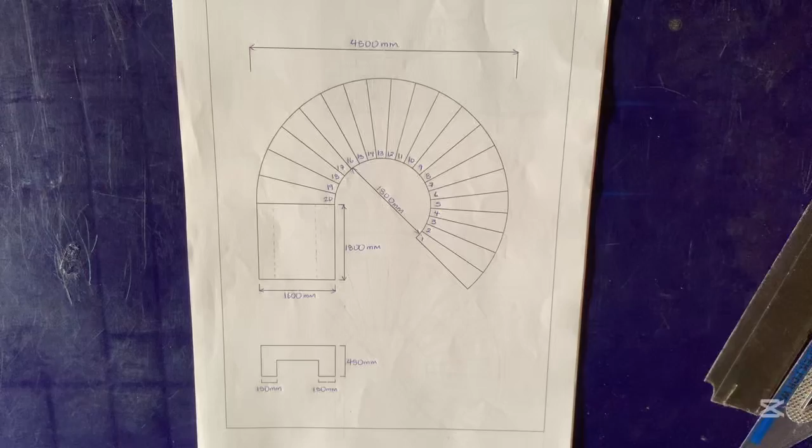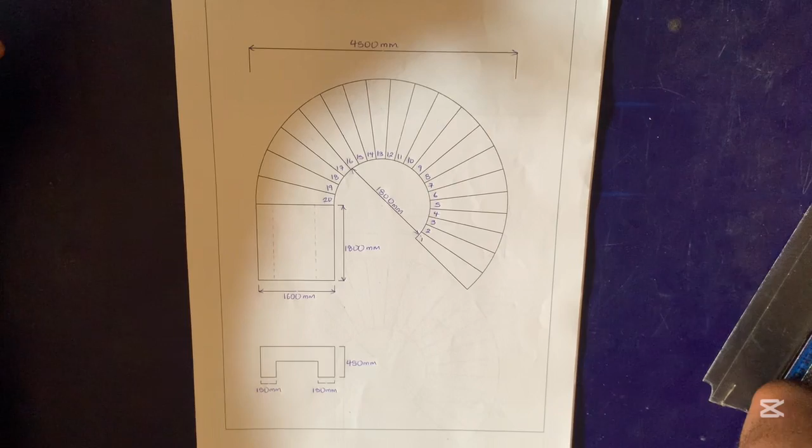In today's video we're going to be treating how to measure the quantities for a spiral staircase. So if you're conversant with measuring the quantities for a conventional or traditional staircase, maybe a dog leg staircase, this is not any different. The only unique thing about this spiral staircase is that it is spiral. However, the quantity that you are going to be measuring for it is the same.

You'll be measuring for the concrete work in the same manner that you measure the concrete work for a normal staircase. You'll be measuring the formwork, the reinforcements, and the balustrades that come with the staircase. So like you all know, the parts of a staircase remain the same. We have the step, the risers and the treads, the waist, the string, the landing, and so on and so forth.

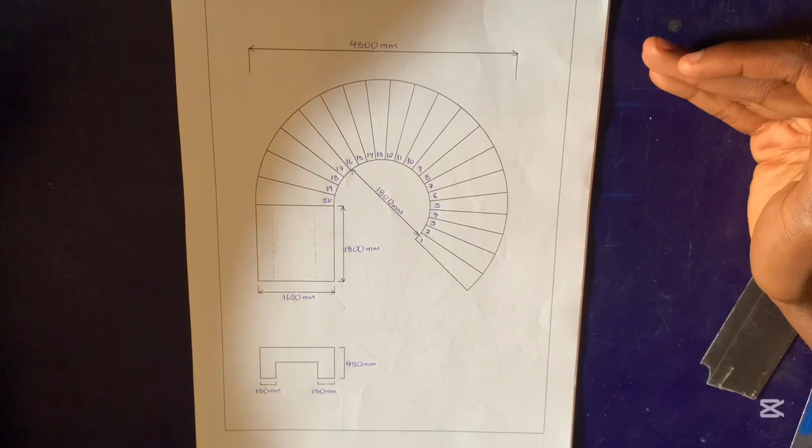Okay, first things first, let us try to understand what the drawing is talking about. So as we all know, this is our landing. You can see that there are hidden details under, meaning that there is a beam under supporting the landing, as you can see in this section here. There are two beams supporting the landing at the sides. The beam ends just on the landing.

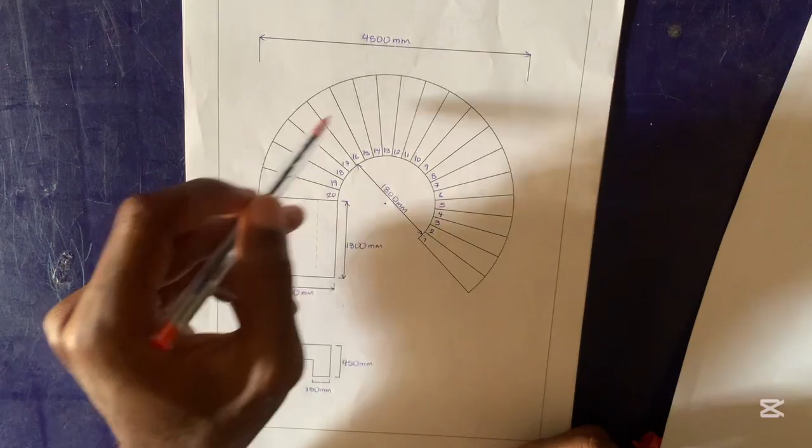There are some cases where the beam goes round the staircase also, just to support the waist. But as you can see in the drawing, there was no dotted line within the waist. The dotted line was only at the landing, meaning that it is only at the landing that we have this beam support. Now the next thing we're going to be looking at is the step.

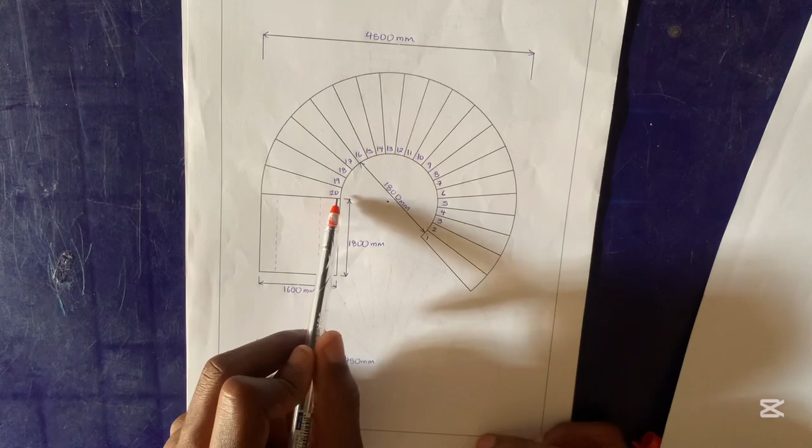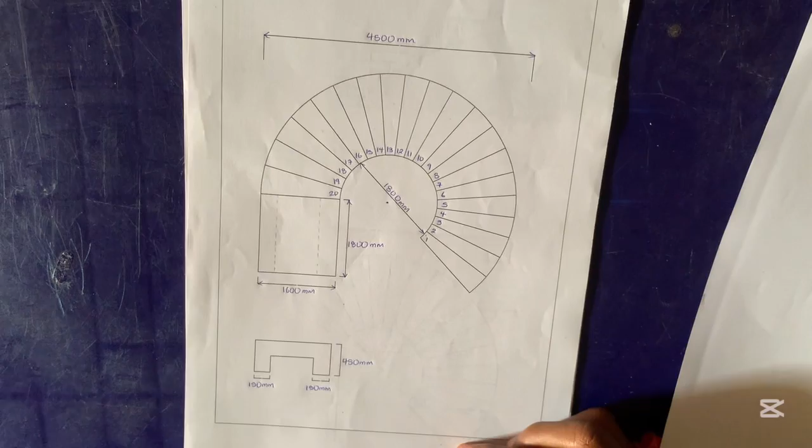Normally if this was a dogleg staircase, the step would be rectangular, but you can see because it is spiral, it is curving. One side is bigger than the other side. So even though we know that this place is going to be slightly curved, you can assume that this is a trapezium shape. So how many steps do we have? We have 1, 2, 3, 4, 20 steps.

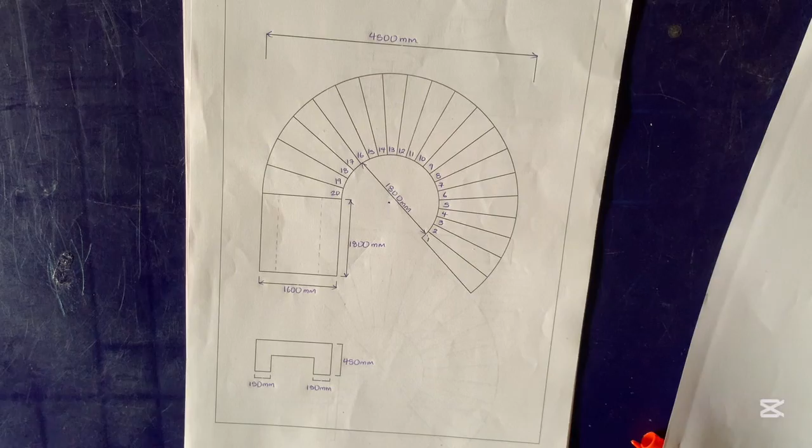20 steps. And they told us the internal diameter of this staircase, because we know that a spiral is kind of like a 3D line, a line curving and moving at an altitude. However, if you look at the spiral from above, from the plan, you are going to be seeing a circle. That is why we have something like this.

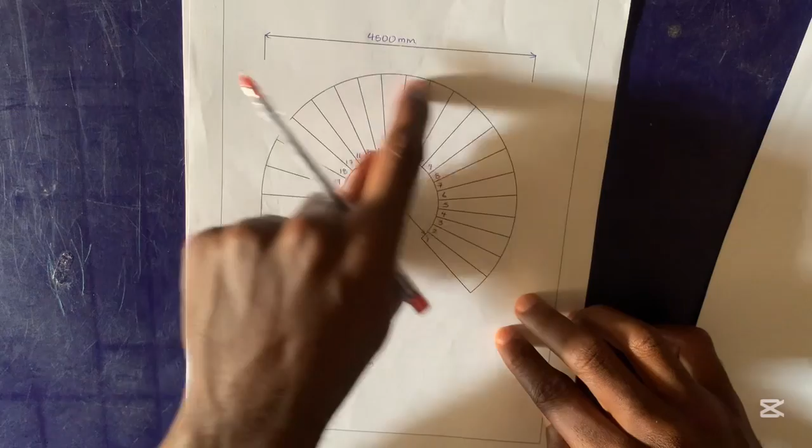Although this staircase does not give us a complete circle. It does not go round multiple times before we get a landing. The staircase just ended here before we have the landing. That is why we have something like a semicircle here. You are seeing a circle here because you are seeing it from the plan. If you are looking at it from an elevation, this is what you are going to be seeing.

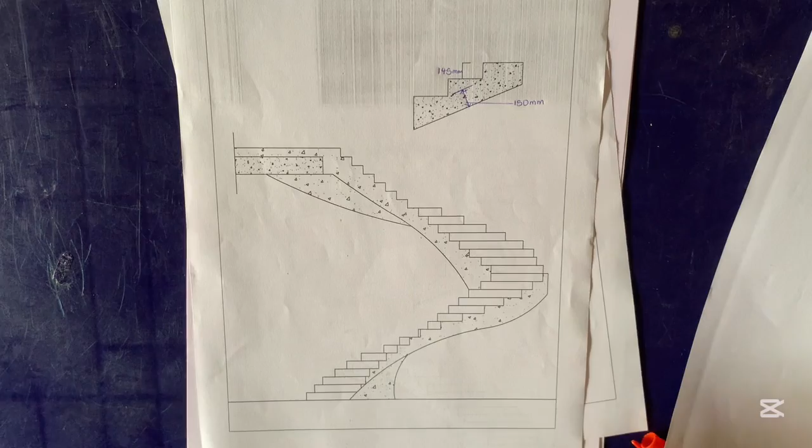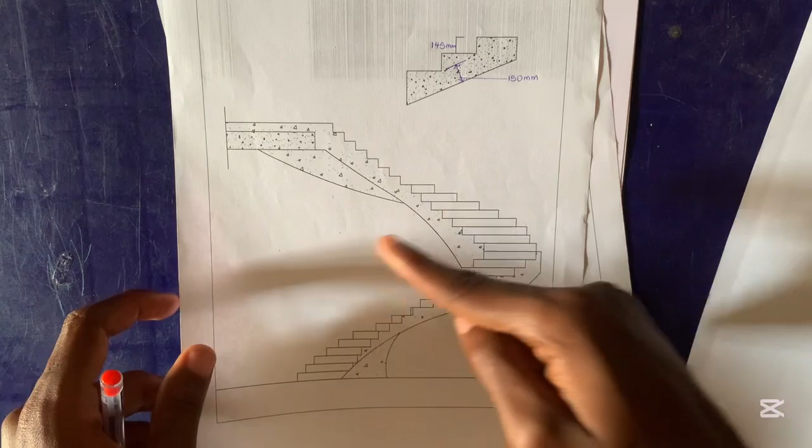I hope you can see this clearly. This is what you are going to be seeing. So you can see that we have a curve, meaning that the landing ended just close to where the beginning of the curve started from. This is just a caricature drawing, but it serves the purpose. So you can see that it is elevating. But if you are looking at it from on top, this is what you are going to be seeing. So we've done our landing, we've done our steps.

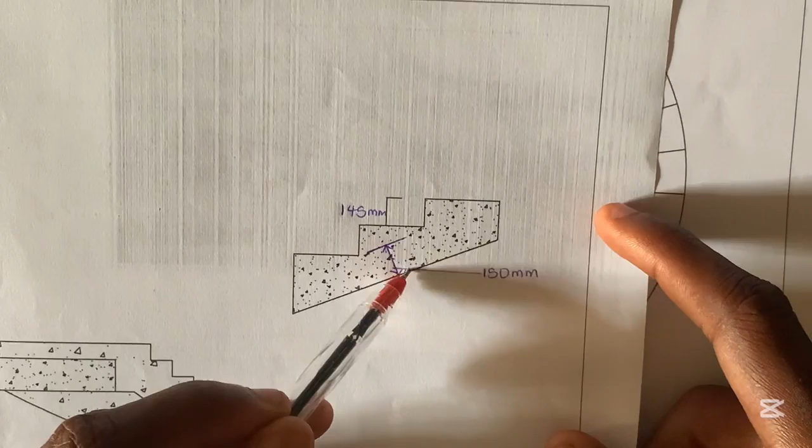Now the next one is the waist. Let me zoom in. The waist is this part here. That is our waist. Normally in the conventional staircase, the waist is going to be kind of a rectangular surface that has a thickness, because we know that our steps are rectangular and the waist is what gives the steps support. The steps are on top of the waist.

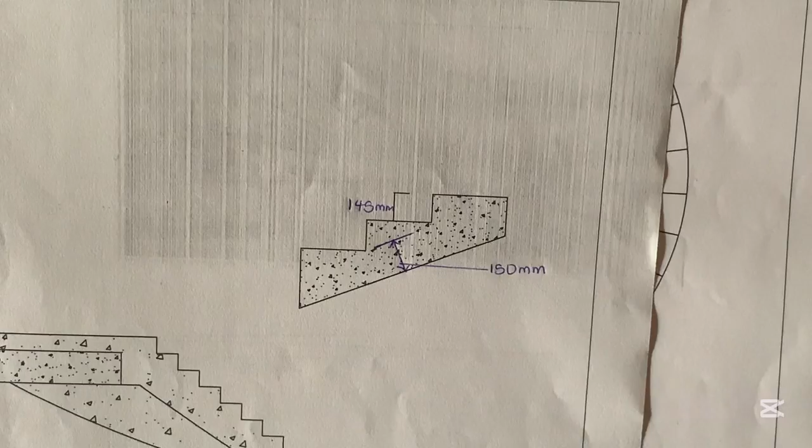However, this staircase is curving. So it means that the waist now is going to follow the curve. So the process we're going to be using to measure the volume for the waist is what's different from the conventional staircase. So these are the intricacies between the conventional staircase and the spiral staircase. Now the next thing we're going to be looking at is how to go about this measurement.

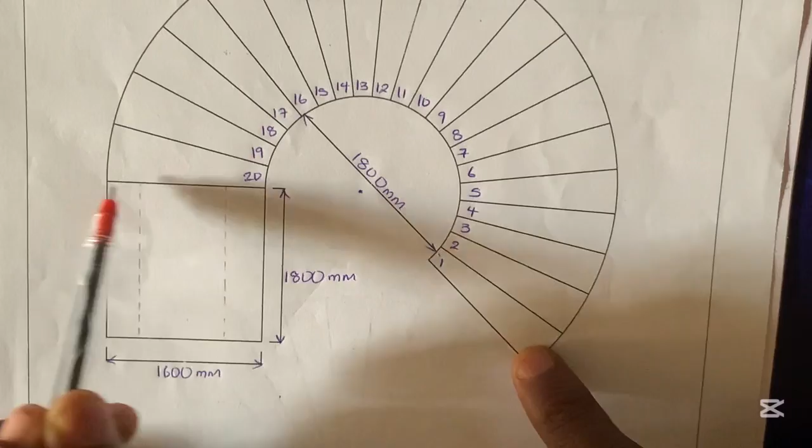So first things first, we're going to be starting with what? The step. I'm starting with the step because we know that the landing is a regular shape, the same way as our landing is in the conventional staircase. So that one is straightforward. However, it is the step and the waist that is different, because you can see that this is not how a conventional staircase is. So now we're going to be putting more attention on the step and the waist.

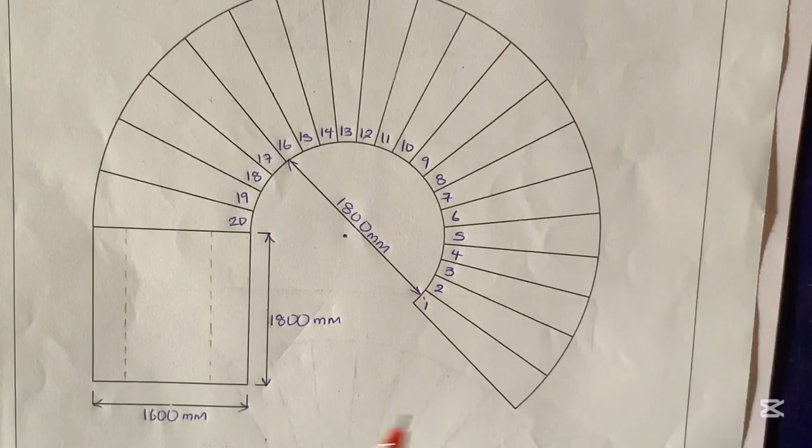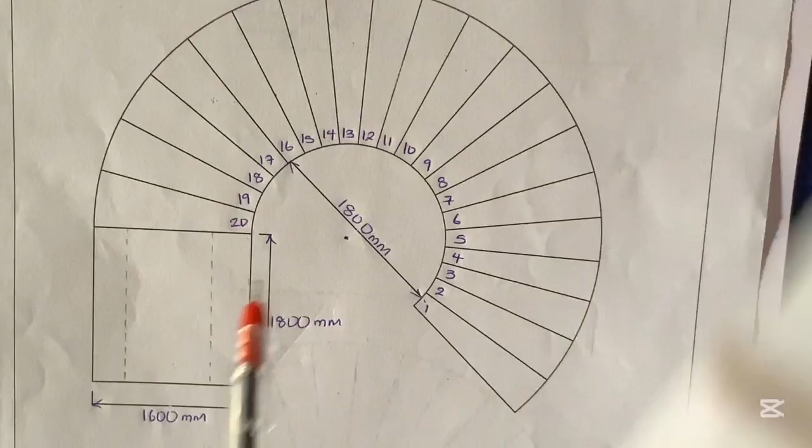So now how do we measure for the what? Step. Now you can see that our step is not a rectangle, right, just as we have in our dog leg staircase. However, this step is formed in such a way that it is going to curve on top of what? The curved waist. Now if you look at this, you can see that this from here to here is our waist, and you can see that it is curving, making it spiral.

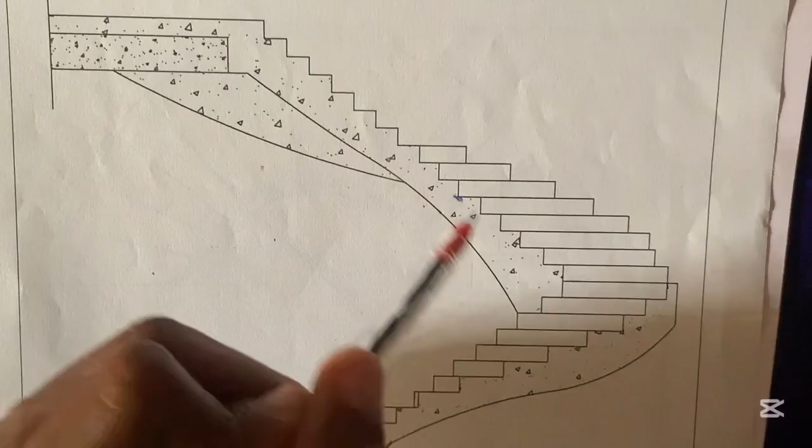So now we need to find an approach that we can use to determine the length of the curve. When we do that, we can also find a way to determine what would be our volume for our steps on top of that curved waist. It is very straight to the point, very easy to understand, so just pay attention. It is not difficult.

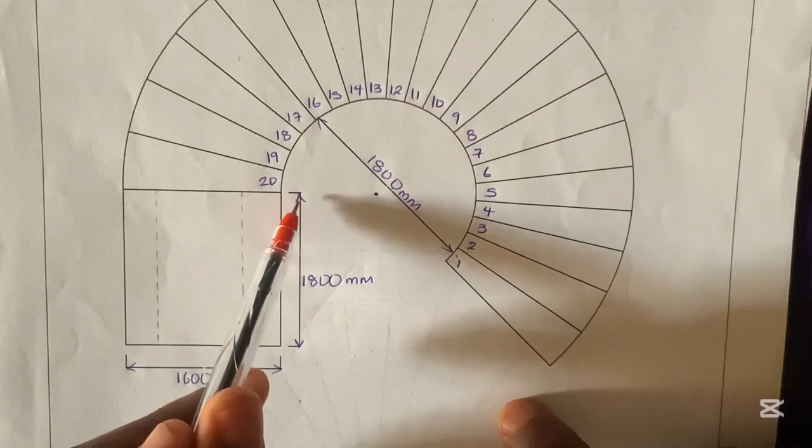Now if we go through the parameters, they said that our landing, the length is 1800 millimeters, and it is as wide as 1600 millimeters. Now they didn't give us the length of this step. So because they didn't give us the length of this step, we have to be smart and find what is the length of the step.

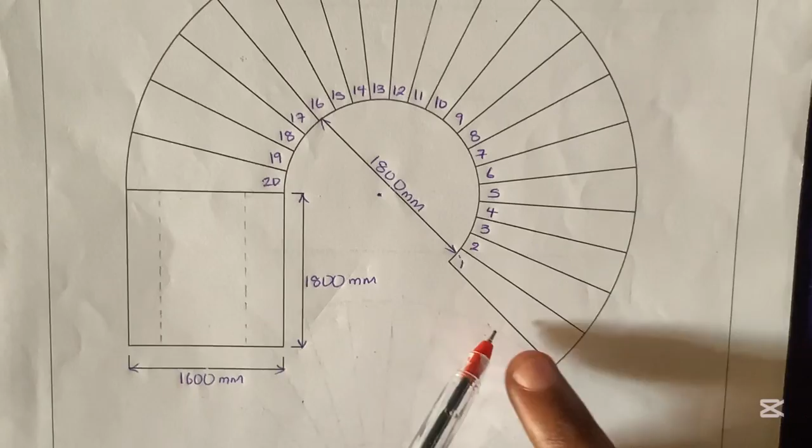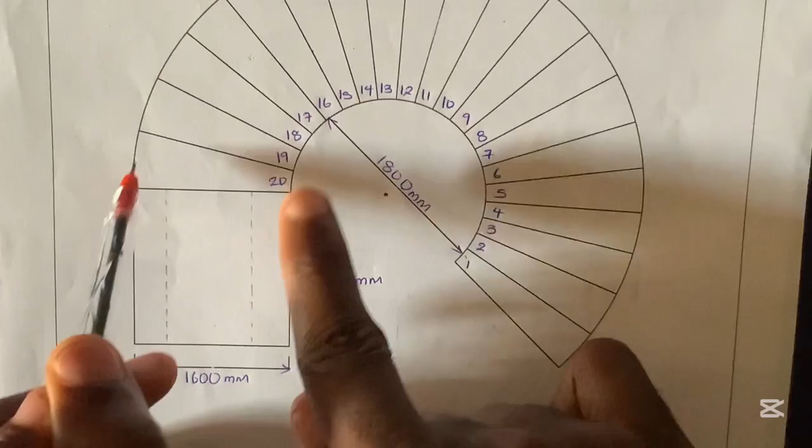So since we know that the length of the step is not given, how do we determine the length of the step? We use our landing, because the step is going to be on the same level as the landing. Now if you look at this, from here to here is 1600. Look at where the step is starting, from here to here, 1600. So it means that the length of each step from here to here will be 1600.

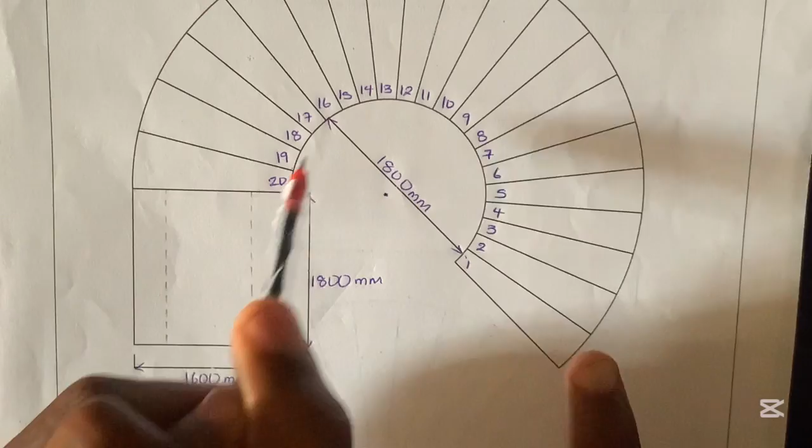The only reason I'm saying it like this is because it is following through the internal diameter, the curvature. That is why you are seeing that it is giving us that bend shape, right? But because they gave us the width of our landing as 1600, it means that the length of each step is going to be 1600. It's just simple understanding of what you're drawing.

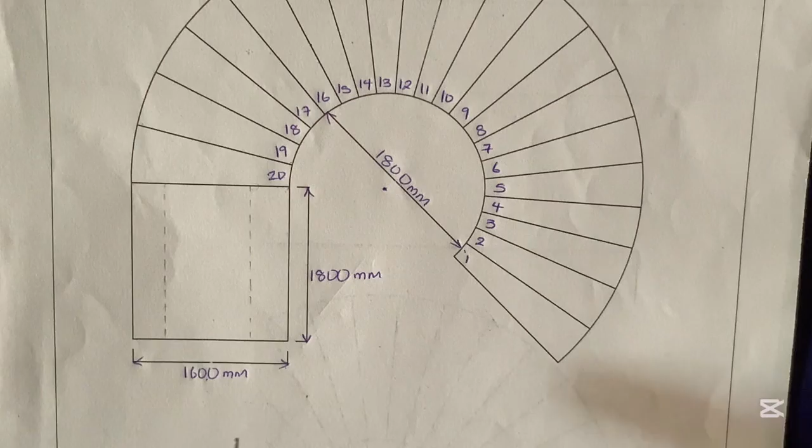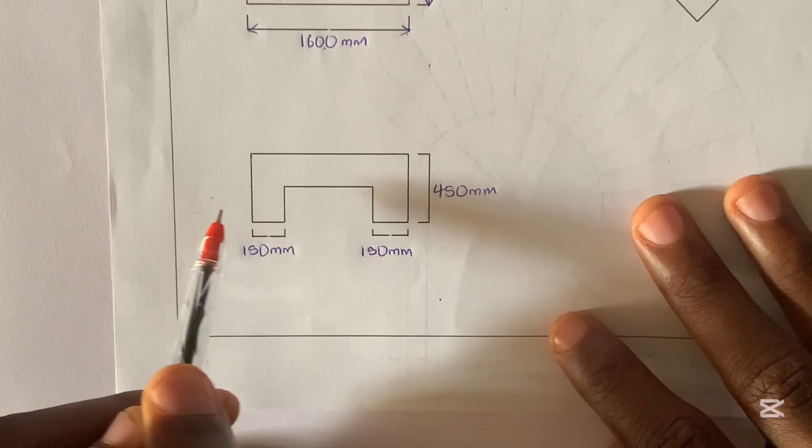So now if you look at this on our beam, they told us that our beam is going to be as thick as 150 mm, and it's going to be as long as 450. So we know that our waist is 150. So it means that from here to here is going to be 150, because the waist is going to be formed in such a way that it will enter the landing. So if our waist is 150, it means that from this point down to this point is going to be 150. I hope you understand the logic.

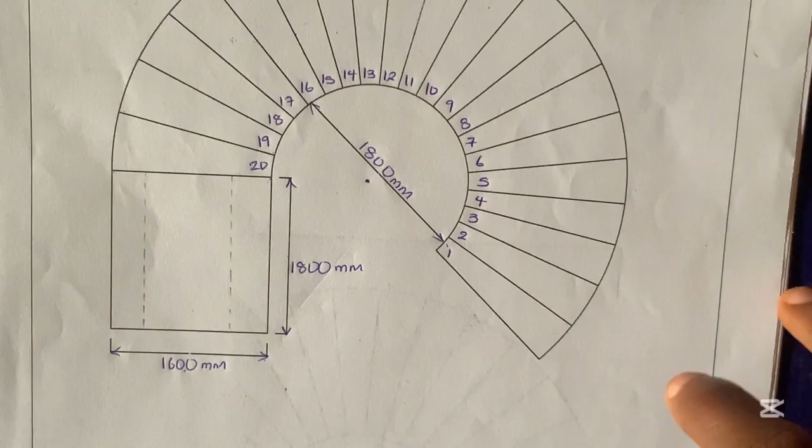Now how do we measure our step? To measure our step, if you look at this, you can see that this is not a rectangle like in our conventional staircase. This is more like a trapezium. Now you can see that this place is a little bit curved, right? But we are going to be forgetting the curvature. We are going to be making this straight. Since it's going to be looking straight, now we can see that this is a trapezium shape.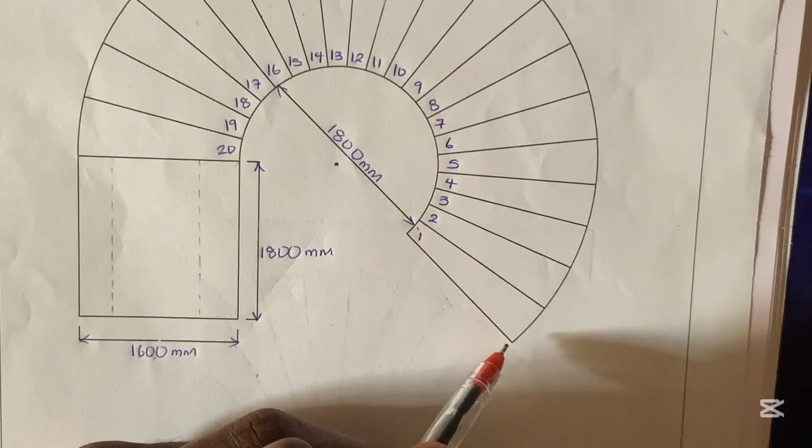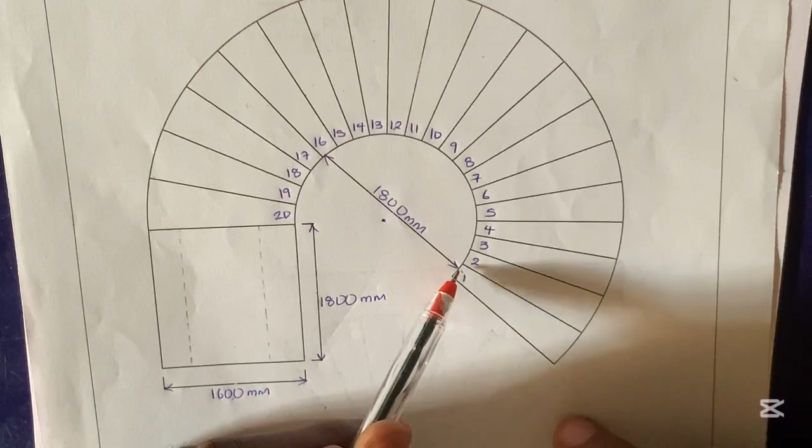Now in cases when we have a trapezium shape, we know that volume is length, width, and thickness. We already know our length of the staircase is 1600. Now we are trying to determine what is our width for the steps. Now you can see that the width for the step is different. The width from here to here is different from the width from here to here. So how do we go about the calculation? Now all you need to do is this.